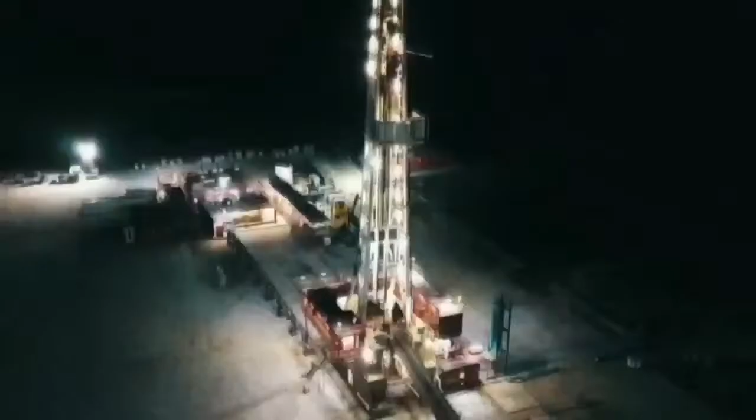Hello and welcome to the V Door Locksmith Show, where we are unlocking the secrets to success in the oil and gas industry. One interview, one technical presentation, and one technical screw up at a time. So happy you guys are here with us on this Friday. We have got an absolutely amazing show for you guys today. Really excited about it.

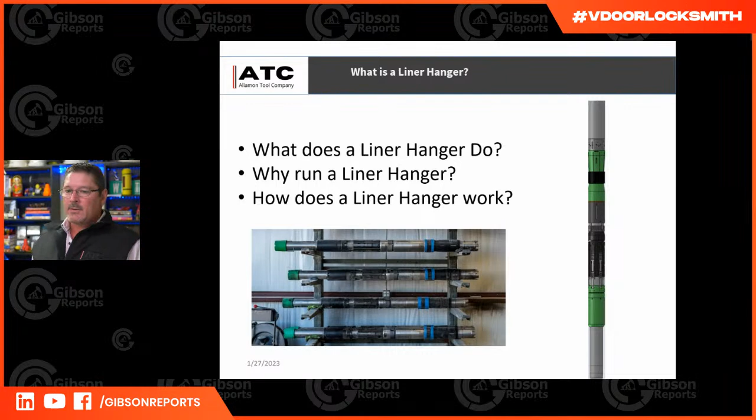And why would you want to run a liner hanger? So I'll show you this wellbore diagram - what's the benefit to run a hanger? This is a pretty traditional 4-string hookup. You've got 9 5/8 intermediate casing, and then a 7-inch production liner at the bottom. Where the 7-inch stops inside of the 9 5/8, that's where your liner hanger would go. You would hang that 7-inch off, isolate with a packer in the intermediate, and then you don't have to run that production casing all the way back to surface.

So what does that mean to the operator? Instead of, most wells in Permian Basin, Bakken, they're going to have 10 to 11,000 foot TVDs, right? So you're saving that 10 to 11,000 feet of casing back to surface. So what does that equate to?

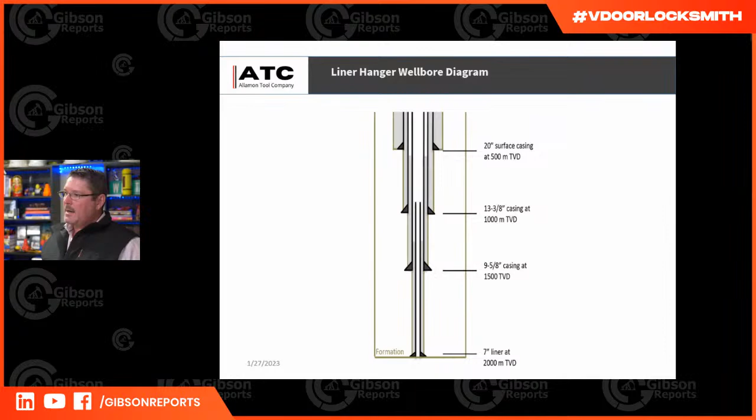So in a 4.5 by 7, or a 7 by 9 5/8, 5 by 7, whatever it might be, the operator's saving somewhere between $500,000 and $750,000 on their AFE. So they're not having to run that casing all the way back to surface. That's the value add for a liner hanger. There's a lot of other benefits it brings that we can talk to, and it gives you options. But that's kind of how a liner hanger works and what the benefits are.

So let's talk a little bit about a production liner hanger. When would you deploy a production style liner hanger? Typically when the rig finishes drilling the well and they TD, they're going to pick up the production casing and run it out. Nowadays most of these are horizontal wells. At the very top of the casing, they will put the liner hanger with the running tool, which is connected to the drill pipe. They'll deploy all that down the wellbore to the measured depth of the well, and then the hanger will overlap up into the intermediate casing. That's how they're deployed.

And most hangers are always cemented in the wellbore. Plug and perf is probably 94, 95% of the completion method in the US. There's still open hole and other ways to complete, but most of the time these tools are cemented in.

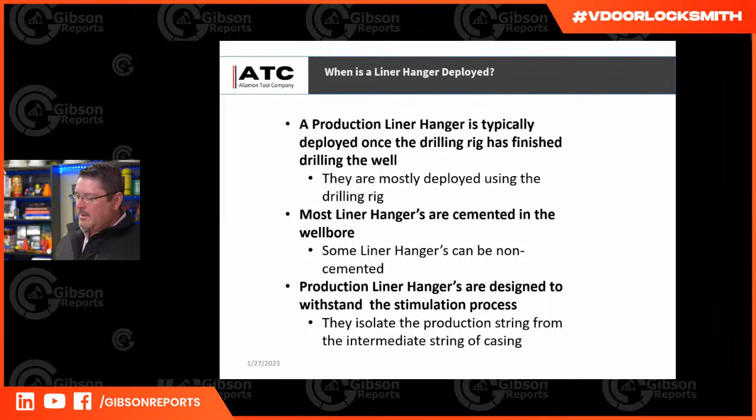And then the last thing, most of your production hangers are designed to withstand the stimulation or the frack. These tools have to have high pressure ratings, burst, collapse, differential pressure ratings, because they're going to be taking the brunt of the frack when they're stimulating these jobs over and over. So just a couple things about the tools - they're not like an aftermarket production tool or a refrack tool. They have to be able to handle some high treating pressures.

So here is, oh my gosh, a cross section. This is what we call our layout drawing. This is our standard 4.5 by 7 liner hanger system. On the top you see the hanger, on the bottom you see the running tool. So let me just go through how this hanger system would work. Basically what would happen is the rig would pick up that casing and deploy it to bottom.

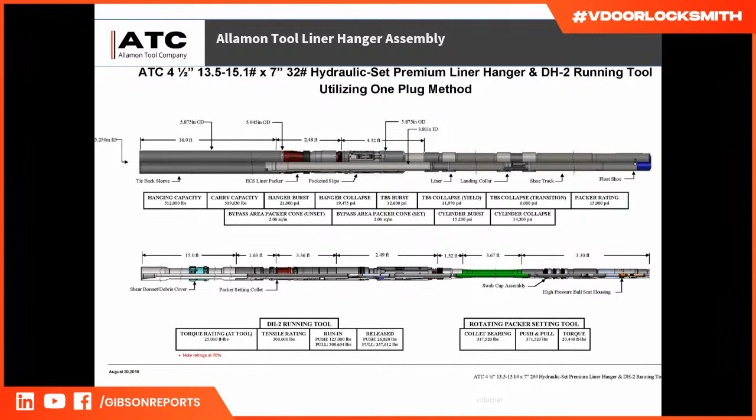Once they've reached depth and you're ready to set the liner hanger, we're going to drop a ball from surface. In this running tool that is stabbed up into the liner hanger, there's 2 ball seats. We're going to pump the ball down, and it's going to land on the first seat. When it lands on that seat, you're going to see about a 1200 to 1500 PSI differential pressure. So you'll see a little spike and the ball will extrude through that seat. We have a sleeve in this running tool that will shift up, and that unlocks the running tool. So now the running tool can engage on the hanger.

So when we want to release it, we can mechanically release it. Let me back up and just say something - this tool is traditionally a hydraulic set, mechanically released tool. That's pretty traditional in the liner hanger world. There's all different iterations - you've got hydraulic set, hydraulic release, all kinds of different ways to do it. This is a very traditional hydraulic set, mechanical release.

So let me interrupt just real quick, just because the MWD side of me always has to ask about electronics - are there any that do this electronically? Not really. You've got expandables in the market, but most of that is all hydraulically controlled. So it's like some kind of mechanical? Yeah, mechanical, hydraulic manipulation to get these tools to set. To my knowledge, there's not anything out there. There's a lot of packers and systems that are electronic, that you can pulsate through the fluid in all different kinds of ways, but no, these are traditionally hydraulically, mechanically manipulated to make them actuate. Okay, great question, just a random question from me there.

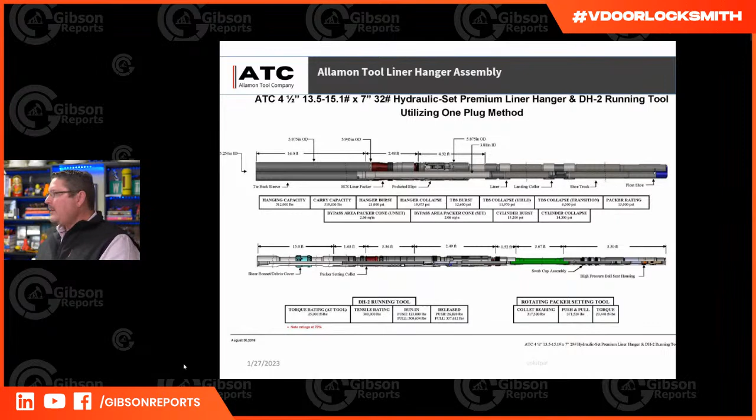So once you've released off the tool and you come out of the hole, now you've got - let me just show you. So now this is what you would have looking at you. The PBR, the polished bore receptacle, is that long piece on top. So that is looking up into the wellbore, and that's going to be the same dimensions as your production casing.

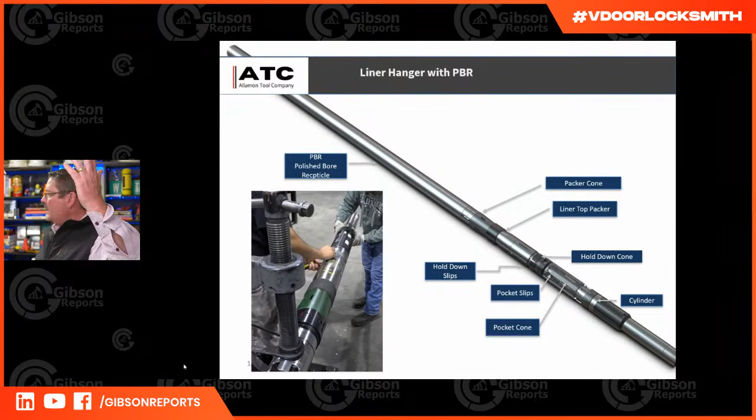So what that PBR allows you to do is at any time in the future, if you have any kind of problems with your intermediate casing, i.e. a leak or some kind of problem, you can run back in the wellbore with production casing and a seal stack, what we call a floating seal stack, and they will sting into that PBR. So now you can produce up the, if it was 4.5, you could produce up the 4.5 casing. If it's 7-inch, you produce up that.

So you're not producing up your intermediate. It's a nice advantage for the life of the wellbore, or anytime they want to re-stimulate or refrac, they might want to go in with the work string and stab into that. So it gives you options there.

So basically, that's what the hanger would look like going into the wellbore. I know a lot of these diagrams don't show the PBR on top. A PBR can be 10 feet, 20 feet, we even do 30 foot. And all that depends on your tube move, right? So the true vertical depth of the well, the temperature, and they do a tube move on pipe manipulation - how much, when you shut the well in and open the well when it's heating and cooling, how much does the pipe stretch. So you know how long to put that PBR in there for those seals to ride.

Excellent, yeah, learning a lot here today. Yeah, so I told you it was pretty technical, but hey, that's what we like. That's what the audience likes as well.

So you can see here, you got your packer, your liner top packer. You've got your hold down slips below the packer, so basically they hold down, so the tool can't go up. And then your hanger pocket style slips on the bottom are facing, the wickers are down, so they're holding down. So when this system's set, it's truly a bidirectional system - it can't go up or down, so it's locked into place. And then you have your cylinder on the bottom, which is your hydraulic portion to set your hanger.

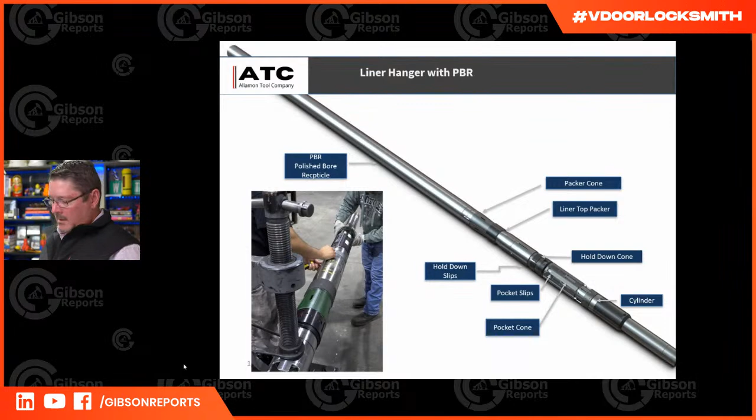So let's talk a little bit. So really the heart of this tool - hydraulic set, mechanically released tool. So the heart of this tool is really your running tool. That's where all the cool stuff happens, that's where all the manipulation happens.

So basically, we have three components. We have a packer setting tool that you heard me talk about. We've got the running or the run-in tool, which is really the beast that does all the work. And then you've got your swab cup assembly on the bottom to create your isolation.

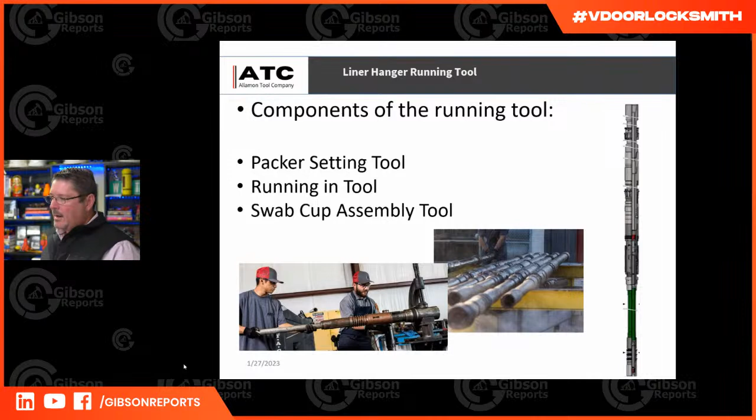So just a high-level overview. Here's your packer setting tool. It's on the very top of the running tool that's stabbed in through the hanger. So once we get our cement done, we bumped our plug.

Now we're going to pick on up. We're released off the hanger, and the packer setting tool will come out, and you can see that red collet there. That collet will pop out, and on top of this PBR here, on the very top of that PBR, that collet will sit down on top, and then we will put about 50,000 pounds down, and that will shear the packer, and now we push that element out to create that isolation. So that's how that works.

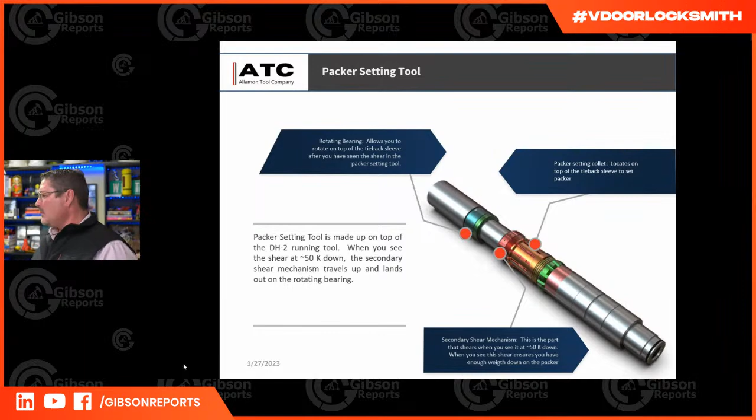One really cool thing about this tool is that we have a secondary shear that when we're setting down, it shears, and it's kind of like a hammer, and it gives you a really nice bobble that you will see on the weight indicator. A lot of times you even feel it on the rig floor. So it's a really strong indicator that you've set your packer. That's a nice feature, because when you're pushing down on the pipe, you don't know if you set anything or not. But if you get that nice bobble on the weight indicator and you feel it, you're pretty confident you've set your packer. So the next part of the running tool is the heart of it.

This is where most of the work is done. So this is the running tool. It's in the center of the whole hookup, and it has a couple of parts. So the first thing, it has the torque ring, and the torque ring is what carries all the weight of all that pipe below you when you're going in the hole. So when the tool's stabbed up, that torque ring is holding all of that casing going down hole as you're deploying.

So then you have torque keys, and the torque keys on the top of the hanger, we have some castellations, and these torque keys lock into those castellations. So as you're pushing all of this out, and everybody knows today that we do 20,000 measured depth wells, 25,000 measured depth wells all the time, you're trying to push all of this pipe, drill pipe, casing, all the way to bottom, and sometimes it gets very difficult. We've got deviations, ledges, so you might need to rotate this thing.

So those torque keys allow you to lock in, and you can turn that whole liner system with all that casing to rotate it to bottom. Oh wow. Yeah, and we do this all the time now.

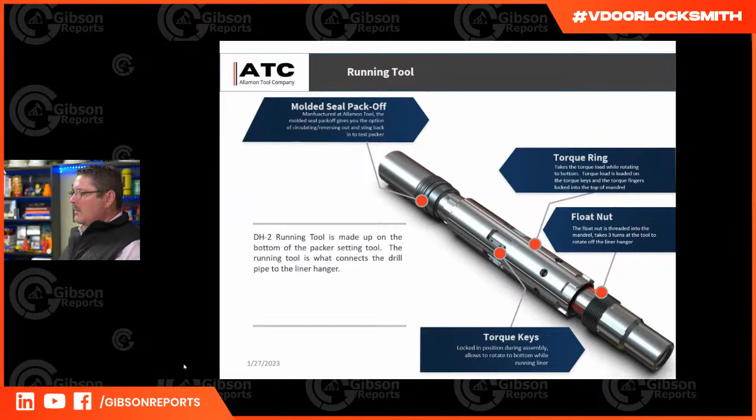And then the 2 other pieces, you got the float nut on the bottom. That nut is what is engaged onto the running tool. So I mentioned the running tool's in the lock position going in until we drop that ball. But when we unlock it, that float nut is what we turn to disengage us from the liner hanger and the running tool. And then the last part of this is that pack off on the top.

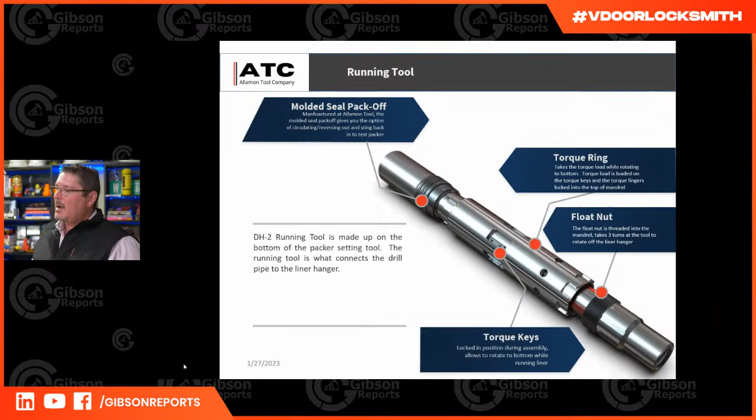So it's a molded seal that we run. When we pick up after we release and we're up in the PBR, we need to be sealed, because when we're doing those tests on the packer, when we're pumping fluid, we don't want to be leaking into the tubing. So that molded seal is very important, and that seal provides us a non-leak path through the tubular side.

So on the running tool, this is just another shot of it with the sleeve shifted up. I talked about those lock dogs. So when we drop that ball into that first seat and that sleeve shifts up, it releases those lock dogs, and now it allows the float nut to engage on the running tool.

So now we might have been rotating to the right, pushing, banging and rotating, but the tool's locked. Once we unlock the tool when we drop the ball, now if we turn to the right, we're going to release the tool. So when we get to depth, we shift that sleeve up by dropping the ball.

Don't do that too soon. No, you definitely do not want to do that. That was said with some authority right there. Yeah, you definitely do not want to drop the ball till you know you're at the depth you want to be.

And then the last little thing that we have on this tool is what we call a secondary release. A lot of people like to call it an emergency release. You don't ever want to say emergency unless you have to. So we call it a secondary release pin.

But basically, if you can't pump, you can't get a ball to the seat, you got some kind of wellbore problems where you can't get a ball down, you can turn this system to the left, and there's a set of shear screws there that will release the sleeve and allow it to move up. Now we can turn to the right and release the tool off. So it's just a backup method in case you can't get a ball to bottom.

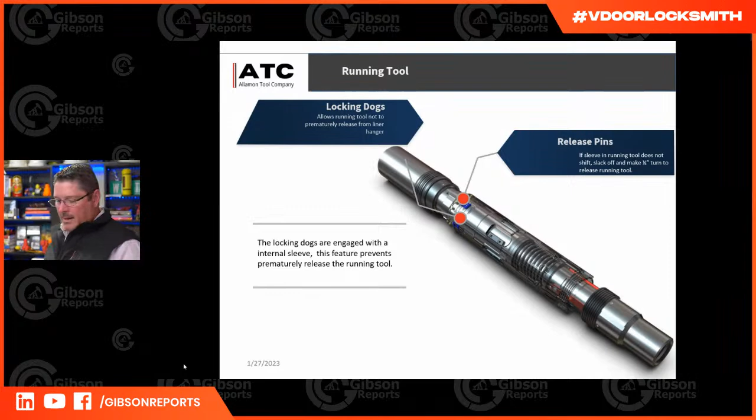So very standard, we don't do that a lot. So I would hope not. Yeah, no we don't. There's times where they have well conditions, they got a leak, they're losing fluid, they can't get returns, and you might have to manipulate the pipe to the left. In drilling world, we always turn to the right, right?

Yeah, correct. So this is just an internal view of the running tool. You can see the upper ball seat there, and that's the extrudable seat. So the ball is going to come down, land in that seat, shift that sleeve up and release those locking dogs, which allows us to engage on the running tool. So the seats are extrudable.

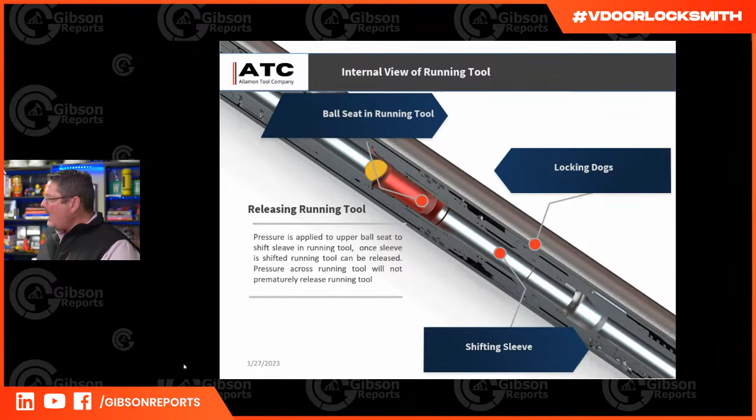We test them, very, very reliable. They work the same every single time.

So the last part of the running tool is our swab cup assembly that goes on the very bottom of the running tool. Typically when that running tool is stabbed up into the liner hanger, we're about 26, 28 feet long, depending on the PBR length. But out the bottom, we'll have a pup joint on there, and these swab cups will be in that pup joint.

So what happens when we get to depth and we're ready, we drop our ball and it unlocks the tool, then it goes to the second seat, which is about 6 feet below. It'll land on that seat, we'll pressure up, and you've got a little ported sub here on the top.

So what we've done now is we've created a pressure isolation between the running tool and the liner hanger. As we pressure up, we hydraulically set that hanger. The swab cups are isolating on the annular, the ball seat is isolating on the tubular. We pressure up about 2,200 PSI, and that hanger fires off and sets.

So pretty simple in the math on how this works. Once we're set, we'll pressure on up, and the bottom seat's extrudable. We'll blow that ball out, and the ball goes down hole.

Now, a lot of people ask, well, what happens to the ball? So under our landing collar, we've got a ball catch system that catches that ball so that it doesn't get tangled up in the float system. So once we pump the ball out, we're not worried about it.

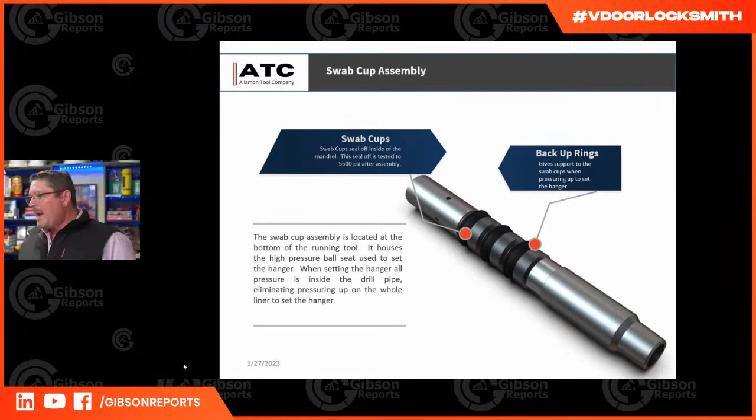So that's basically how this system works. I know I kind of stayed high level. And this is just another internal picture of the high pressure ball seat and the swab cup assembly.

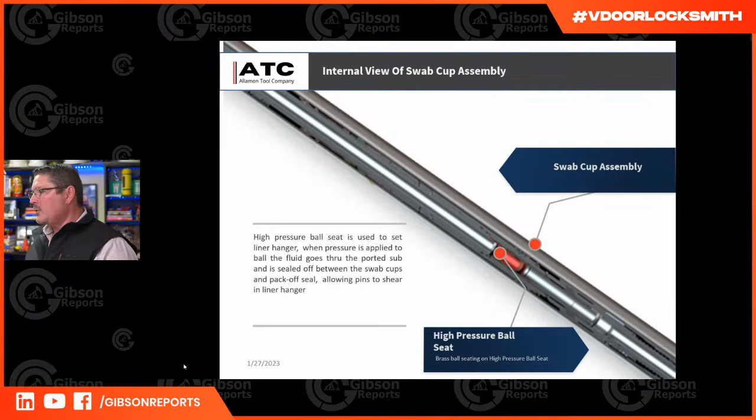So I just talked about how we create that isolation. Back to our layout drawing, and I would love to have an animation that I could show you guys, but we didn't get it loaded right. We could show you how the tools manipulate going downhole. It's pretty neat, but we didn't have that.

So again, it's a hydraulically set, mechanically released tool. And we run these things every day. It's a great saving to the operators. That's our value. A lot of people in days past have had fear of liner hangers because it's a pretty complicated system.

But when you break it down and keep it simple and perform, these things are great. They save the operators lots and lots of money. They work efficiently, and these tools have been around a long time. We've had these tools for a while, but Baker, Halliburton, Weatherford, everybody's got a liner hanger that's a very proven system that has always been around for a long time.

But as I mentioned before, you're only as good as your service hands. So these guys deploying these tools, there is so much hydraulic and torque and drag, tool moves, hydraulic things going on downhole that they have to understand and be very well versed in.

So, and also quality, right? When we make these tools up, everything is tested. We fire every liner hanger off in the shop before we send it out. So quality, QA, QC is very important as well. We think we do a good job at that. But hopefully I helped enlighten people a little bit on what a production liner hanger looks like.

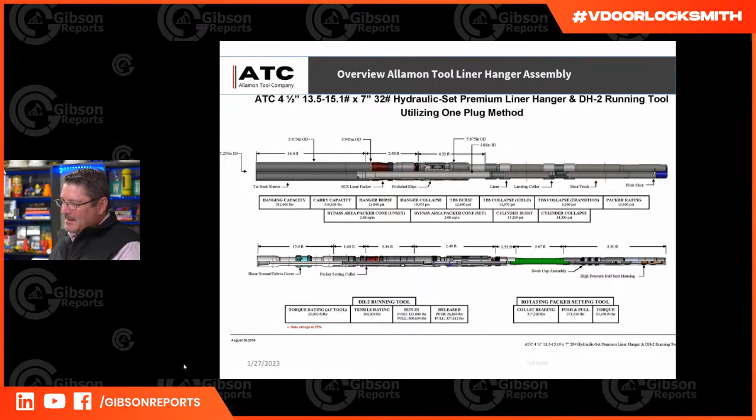Yeah, I mean, I'm definitely learning way more than I'm going to retain at this point in time. So I know we've got a handful of questions. Is this the last slide? Yeah, that's the last slide, so we can jump to some questions.